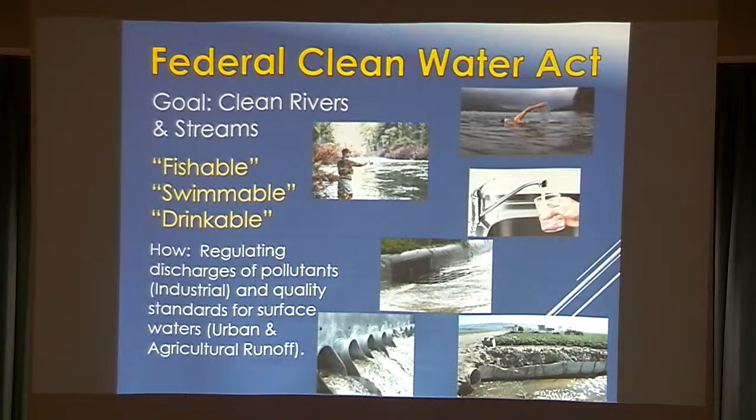The Federal Clean Water Act is why we're here today. The goal is clean water. We want the waters to be fishable, swimmable, and drinkable. The way this is done is by regulating the discharges of pollutants into our waterways and setting water quality standards for surface waters. This can be urban and agricultural runoff. We have a large footprint on this world, and this is a way to help offset those sometimes destructive things that we have, such as oil and other pollutants.

Stormwater management is mandated by the Environmental Protection Agency. It's required, as we just saw, by the amendments to the Clean Water Act in 1987. It's implemented in New York State by the DEC and the regulated municipalities.

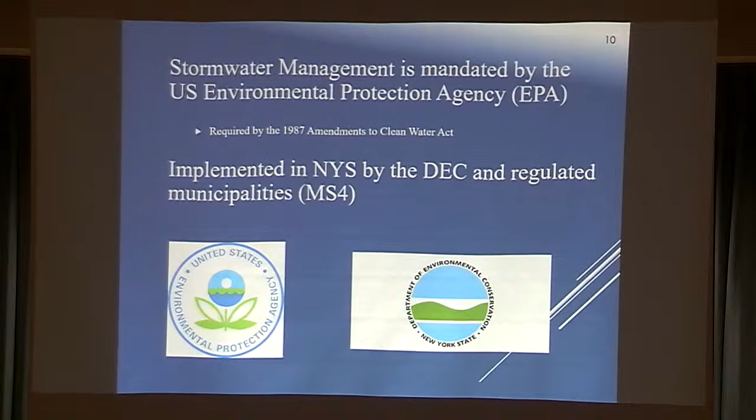So who knows what municipal separate storm sewer, oh sorry, I just gave it away. Who knows what MS4 stands for? Anybody? All right, well, that's why we're here today, to learn a little bit about the system which Schenectady County is under.

So it's Municipal Separate Storm Sewer System. This means that the water that goes into our catch basins, our ditches, is not treated before it goes into the Mohawk River, in our case. Some municipalities have large sanitation facilities to clean that water before it's put into a river or something. But in Schenectady County, that water that goes into our catch basins from the roads goes right into the Mohawk River. So the goal is to keep that water as clean as possible before it goes into the river.

Why do we do that? We want to keep our water clean, right? We drink water, our plants, our animals depend on that water. And if it's polluted, there's going to be some issues.

So, like I said, the water does not get treated. It is conveyed through water systems, ditches, catch basins, culverts. It's not part of a combined sewer, so the sewer is separated from stormwater, and it doesn't get treated. That's the big thing.

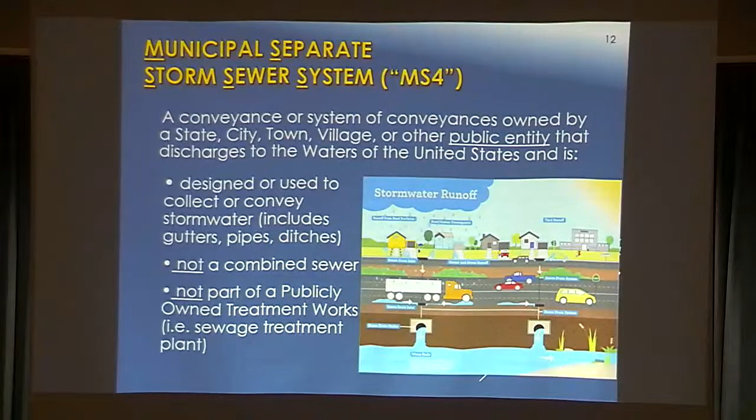So in a regulated MS4 community, there's a stormwater management program in place. Usually there's an MS4 coordinator who implements the plan. There are 6 key aspects to the stormwater management plan.

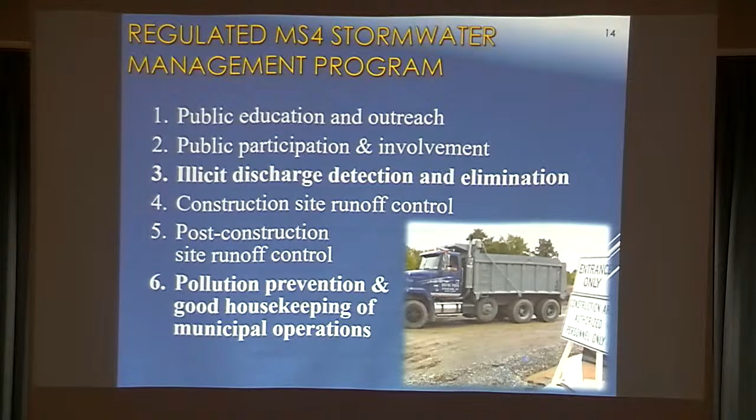Some of these are taken care of, such as public education and outreach by groups such as the Water Quality Coordinating Committee, and public participation and involvement, which is really just landowners doing what they can. In our case, in municipal operations, illicit discharge detection and elimination, which is number 3, and number 6, pollution prevention and good housekeeping of municipal operations, is what we can do to keep our water as clean as possible.

4 and 5 are really important to construction sites, and even some of the municipal operations such as culvert replacement and ditching. So it all kind of comes into effect, but we're going to really focus on 3 and 6 today.

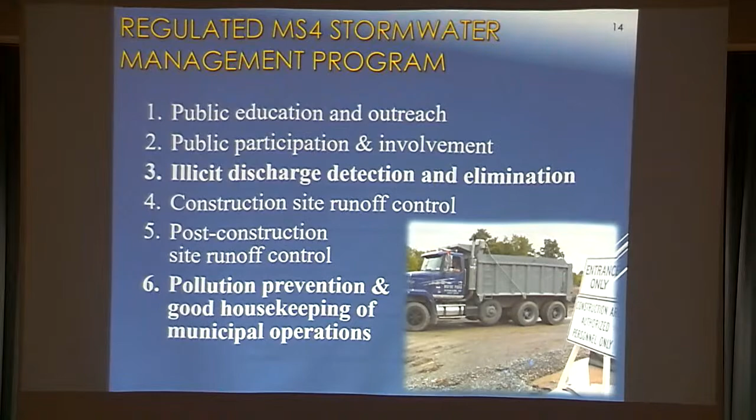So, illicit discharge detection and elimination. There are some requirements within the stormwater management plan and regulations set by DEC for MS4 communities, and that's to map the location of all outfalls and receiving waters, and to look at those and survey them from time to time to make sure that they are functioning properly and the water coming out of them is as clean as possible.

Another thing that we can do is report illicit discharges observed in the field. You guys are out there driving the roads, looking at catch basins, to keep an eye out for that. Some of the sources of illicit discharges are failing septic systems, which—we live in an urban area, we don't have a lot of that.

But maybe some of the rural areas, we can see that. Laundry wastewaters, improper oil disposal. The guy that doesn't know what to do with his used oil dumps it down the drain. That's an issue. Illegal dumping in ditches. Those ditches flow downhill and eventually into the Mohawk River. So we want to keep pollutants out of those ditches.

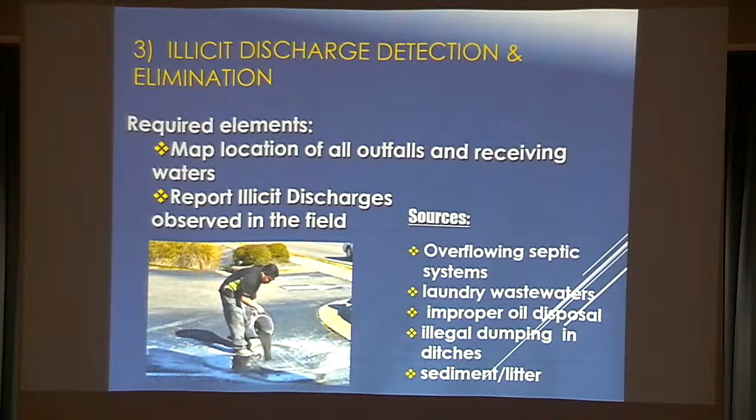And then sediment and litter. So just dirt or soil, road salt, sand, garbage that people throw out or gets blown around when people put out their garbage for garbage day. We want to make sure that we can keep those ditches and those water conveyances as clean as possible, because they do flow downhill.

And then pollution prevention and good housekeeping. Some of the requirements - this can be anything from park maintenance to vehicle maintenance, stream and wetland modification, so culvert replacement, everything that you guys do on a day-to-day basis. There's BMPs, which are best management practices, a way to complete the necessary tasks in a way that we can mitigate the pollutants that are discharged into these water conveyances via stormwater.

You can see the sediment in the one photo there going into the catch basin. That's not an ideal situation. And the big thing, what we're doing today is employee training, educating you guys on some of these practices to help mitigate this issue.

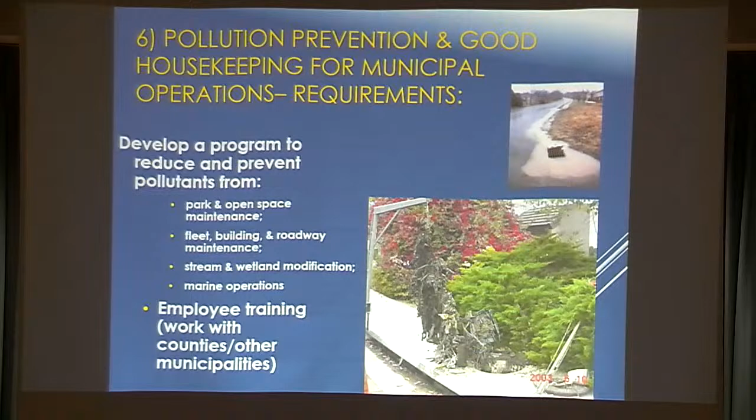So why is stormwater a concern? We already went over some of this, but we care about our plants and animals. We care about our water quality. We drink water, how we need water. Keeping these pollutants out of the waterways is so critical to make sure that we have fish for our kids to catch, and have frogs and all the animals that are so critical to our survival in a healthy ecosystem.

Where does it come from? Obviously the rain, but paved surfaces, rooftops, impermeable surfaces are an area where this water is directed to these ditches, and it can increase velocity over those paved surfaces, causing erosion and sedimentation. So all of what we're going to talk about, these BMPs are going to help mitigate the amount of stormwater and then the pollutants found in the stormwater.

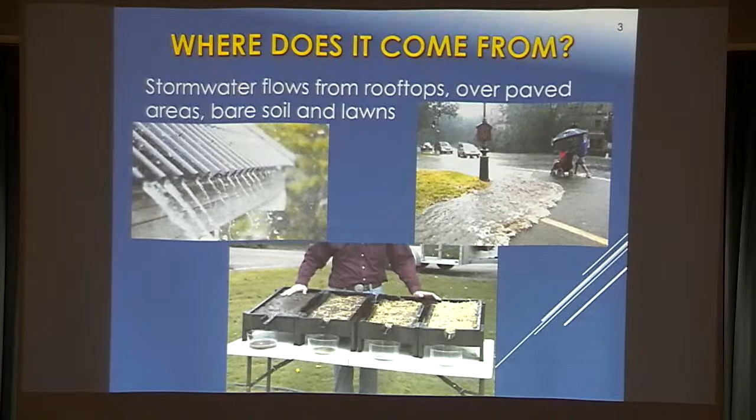A good example here on the bottom of the picture, a mulched surface versus an unmulched construction site. What they do is they simulate a rainfall event over these areas, and you can see the sedimentation coming off of the box on the left. It's unmulched. The water does not infiltrate into the soil, it runs off. On the far right, a heavily mulched surface lessens the impact of the rain falling on the soil and allows it to infiltrate into the soil, greatly reducing the amount of sediment that runs off of that area. So that's why these BMPs are very important.

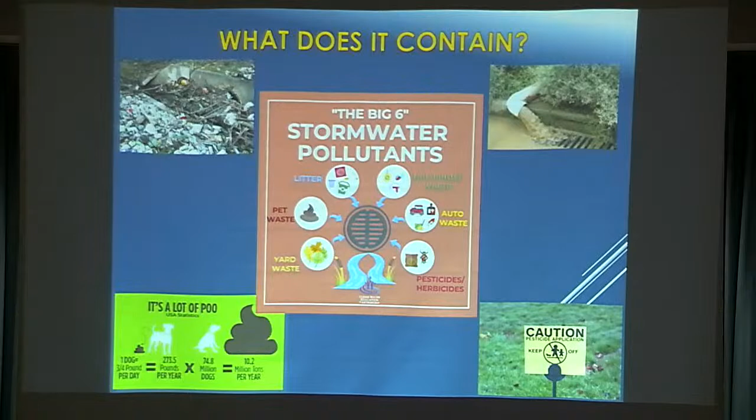Picking up leaves, pesticides and herbicides are a big one. Everybody likes a pretty lawn, but it's not always the most environmentally friendly thing. If it's applied at the proper application rate, it can be all right, but we want to make sure that those application rates are followed. It's not always the more the better, or more the greener. Follow those directions.

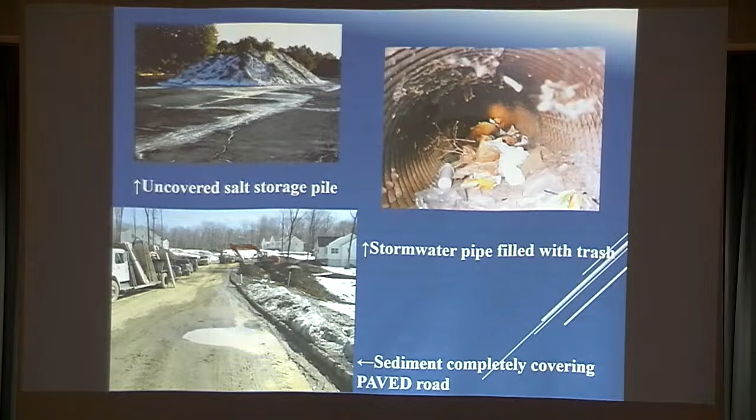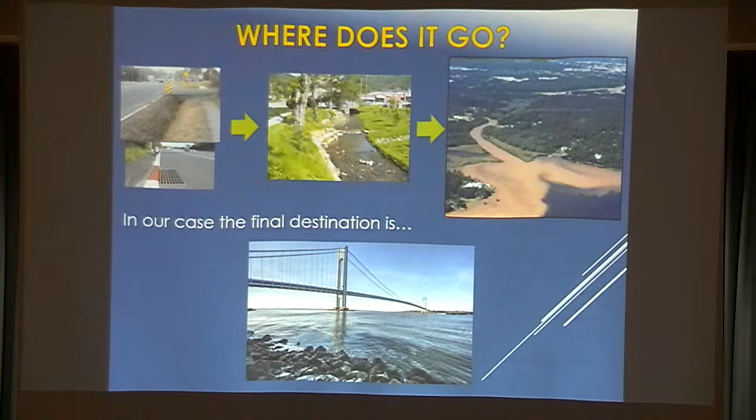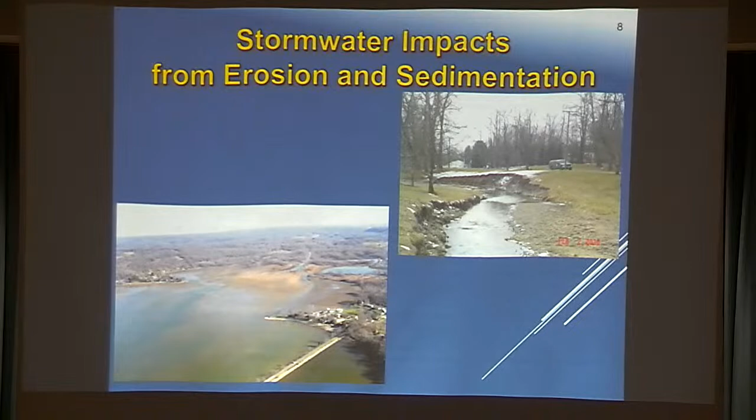Not everything can be - we can't fix everything, and we can't protect, especially on some of these really heavy rainfall events. But we can do our best to try and mitigate it with some of these BMPs that we'll talk about.

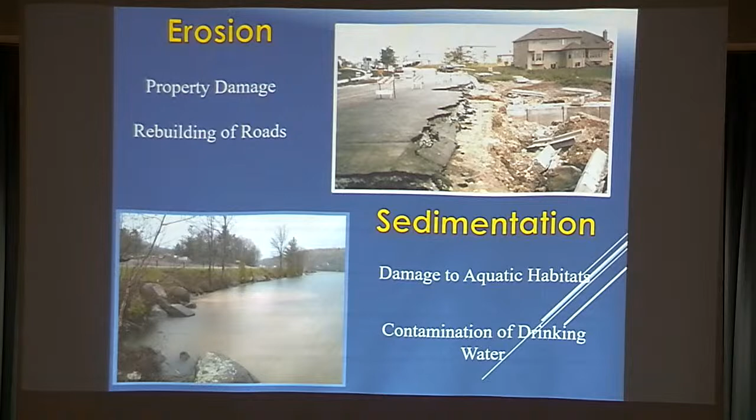So here we're going to get into some of these BMPs and actually discuss what we can do.

So the municipal responsibilities for pollution prevention measures - really, there's going to be a lot of things kind of repeated here, and that's to get you to think about it more.

It's really about maintaining a clean working environment, organized, containing paint, solvents, hazardous materials, spill response. Quickly and effectively cleaning up these spills is critical to prevent pollutants in our stormwater.

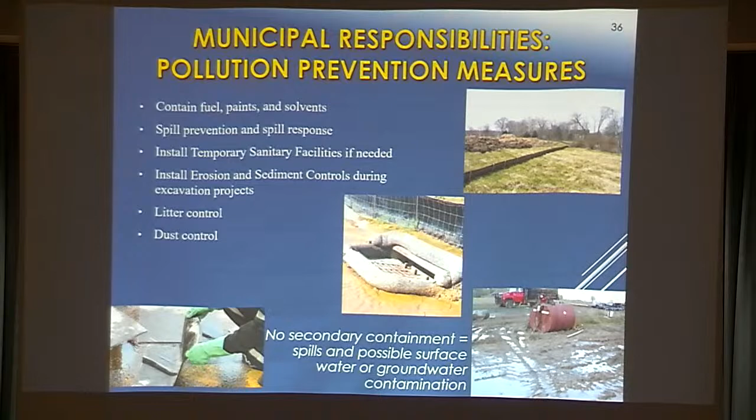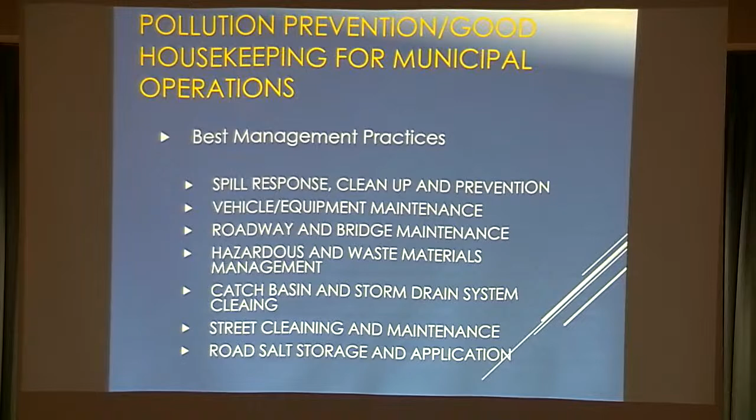So spill response, like I said, it's critical to be quick and effective at cleaning up these spills. There shouldn't be a delay. It should be immediate - we get those spills cleaned up using some of these practices: filters, absorbent pads, cat litter can be used, absorbent materials to pick up those spills and clean it up.

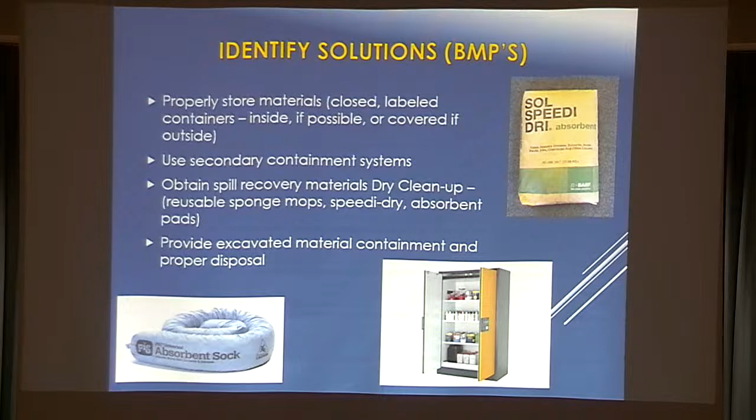We don't want rain coming down and washing them into the storm sewer. We want to have those cleaned up before that. So a big thing is properly store the materials, use secondary containment systems, use those absorbent materials, and then provide a way to properly dispose of those. We don't want to just be putting those in the trash - we want to have a proper way to dispose of them.

The oil and pollutants, the sediment, are then pumped out by a contractor and treated in a proper manner. The water is usually conveyed into a settling basin to settle out and properly be treated.

Checking the containers for leaks, keeping a clean working environment, making sure that stuff is under cover, inside storage if possible, and protect the storm drains.

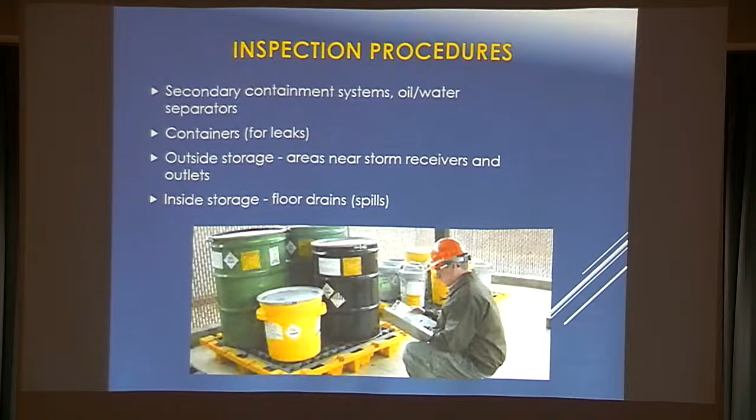So like with everything, it requires maintenance. It's not just go out there and do it and leave it. These things always need to be monitored and maintained.

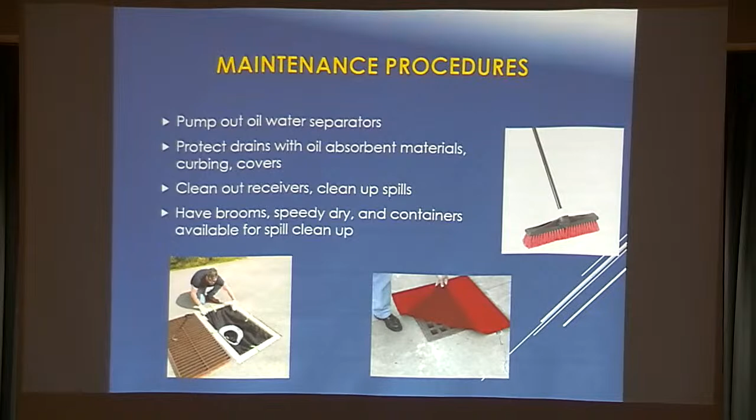So pumping out the water and oil separators, protecting the drains, cleaning out receivers, clean up spills immediately, have brooms, have everything ready to go, have a spill response kit handy with everything labeled so you're not thinking about it - it's just right there and you're ready to react to the spill.

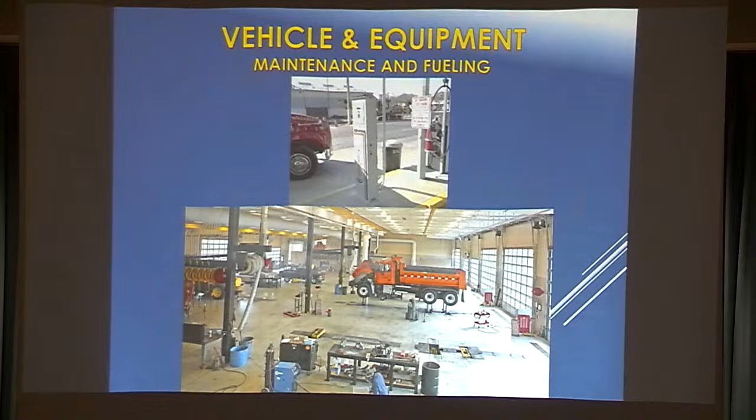Vehicle and equipment maintenance and fueling is a big one with municipal operations. What can we do to reduce the pollutants within our waterways with that?

An important one is report damage and leaks immediately. If you've got a truck that's leaking oil, get it fixed, so it's not running down the road leaking oil that's all going into our waterways. Conduct maintenance work inside if you can. It's not always possible. If not, maybe find a tarp to drape over the hood of the truck to keep the rain from washing that down the road.

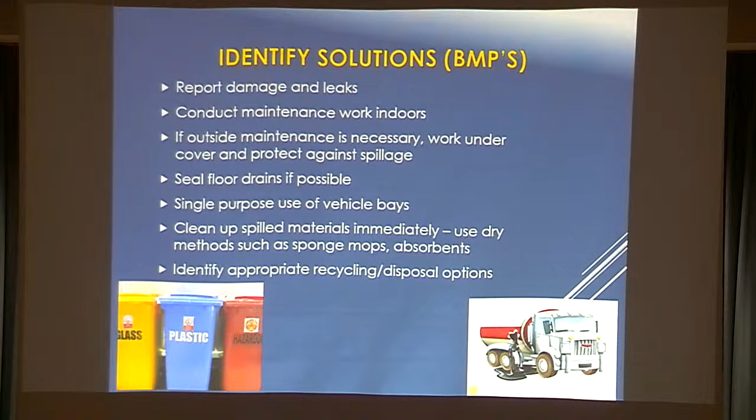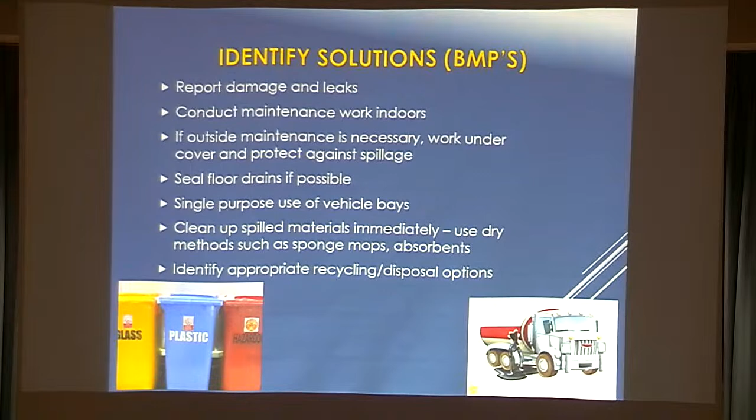Single-use purpose of bays makes it really nice, so when you're working you have everything you need for a spill, whether it be changing the oil, everything you need in that bay is there, and you're not trying to search for stuff when you really need it. Again, appropriately dispose of the materials after you've cleaned up the spill.

Again, in these maintenance areas, oil water separators are always good to have. Never leave vehicles unattended while you're fueling, in case the mechanisms to stop the pump from fueling don't work. You don't want fuel all over the place. Let's keep everything clean.

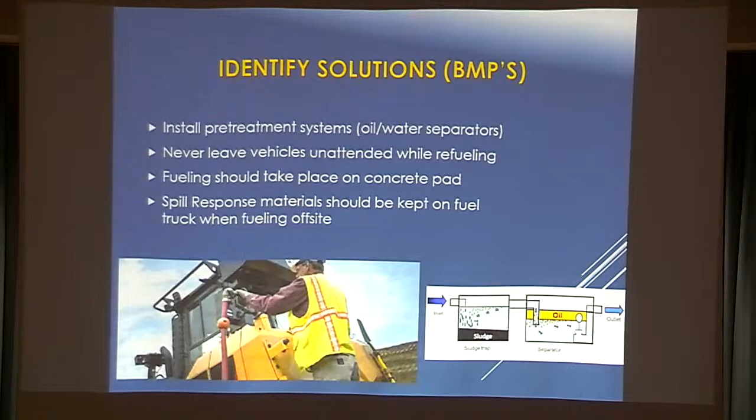It should take place on a concrete pad. There should be proper fueling areas where they're curbed, so the fuel, if there is a spill, isn't allowed to flow into a catch basin or a ditch. And again, in these areas, spill response materials should be readily available so that if it does happen, we can clean it up.

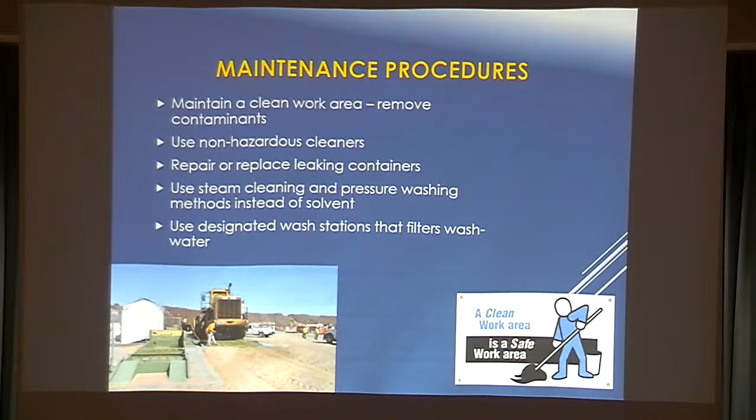Once again, maintenance is a big thing. We've got to maintain a clean work area, remove contaminants, use non-hazardous cleaners if possible, repair and replace leaking containers. There are alternate cleaning options - steam cleaning, pressure washing instead of using solvent - that's always a good thing. Why introduce a pollutant if you don't need it? So just trying to do what we can to mitigate the amount of pollutants or hazardous materials we're using is something that we can do.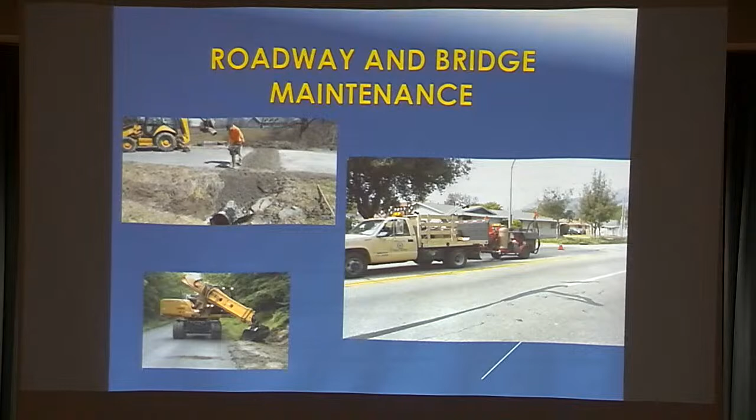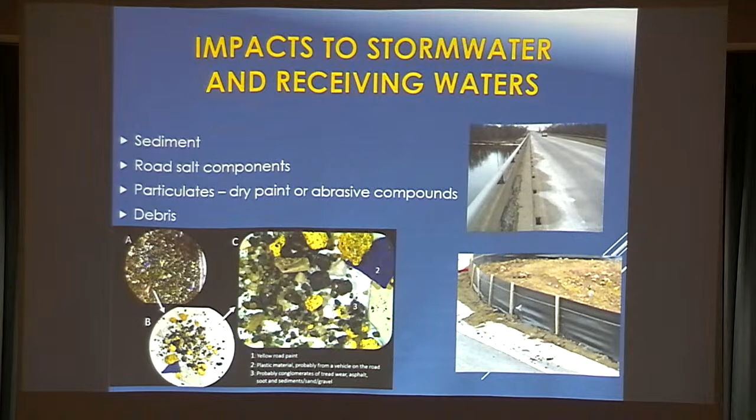So here's some examples: sediment from construction sites, road salt, which can negatively affect our natural environment, particulates from dry paint and abrasive compounds, and debris such as garbage.

So what are some of the BMPs that we can do during our day-to-day operations? We can incorporate preventative maintenance and planning, plan ahead, have those BMPs in place. How is the water going to be treated before it gets to the stream or the river? Pave in dry weather - not always possible during summer storms - but as much as possible, it's always best case scenario to do that.

Stage road operations when you can, avoid spills, cover catch basins if possible. And as I've said many times already, clean up the fluid leaks and spills immediately, so we can keep those pollutants from entering the waterways.

Also restrict the use of herbicides. Mowing is time-consuming, but using herbicides is not always the best. When you're using herbicides, you're killing off that vegetative material, and it's not able to effectively treat the water that's coming off the road.

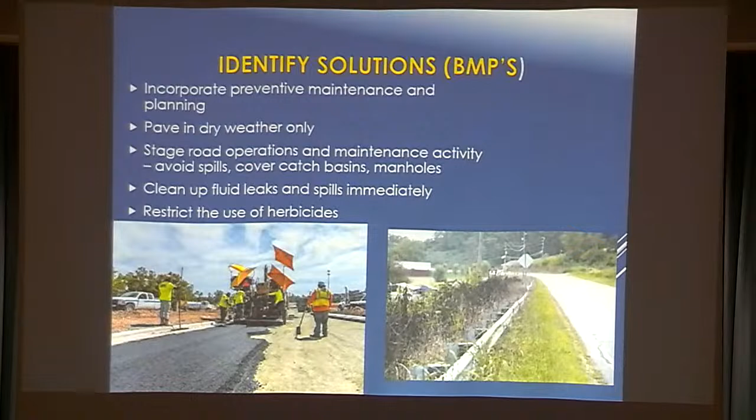That vegetation is slowing down that water. The roots of that vegetation are allowing the water to infiltrate into the ground. It's taking up pollutants, and the plants will use some of that depending on what it is, and clean the soil. So killing that off is not ideal. We want to keep that vegetation alive and serving its purpose. So the use of herbicides is not ideal - better to mow it, even if it is a little bit more labor intensive.

Some other BMPs: sweep and vacuum roads. It's going to pick up that sediment, pick up that debris, so it's not carried into our stormwater system when we have a heavy rain event.

As I said, maintain roadside vegetation. So after ditches are cleaned, there's an example there in the lower corner of hydroseeding. This is a mix of seed, some sort of grass seed, fertilizer, tackifier, and mulch, which protect the soil from erosion during these heavy rain events.

The idea is to get that grass, that vegetation, growing as quickly as possible so it can serve its purpose and filter the runoff, allowing water to infiltrate as much as possible. Having water in the ground is always better than having it flowing down a ditch. We want it to go into the ground where it can be stored, instead of running down the road ditch and gaining speed, which causes more erosion. The faster the water is moving, the more erosion takes place, and that vegetation slows it down and allows it to go into the ground.

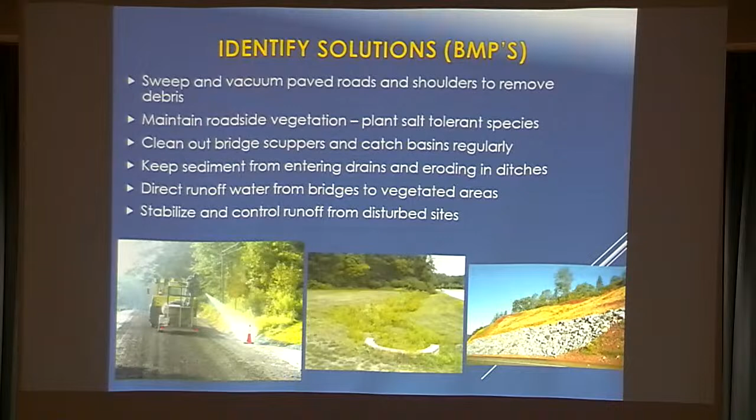So you can see the rock that's used to armor the hillside. That's going to help that slope stay in place and keep the sediment from flowing down the hill into the road ditch.

We went over some of this hazardous waste and materials management, but it's so critical to keep things organized—keep them labeled, know what's in it, and make sure you're using the right product for the right application. Eliminate floor drains; we don't want these materials flowing into our waterways.

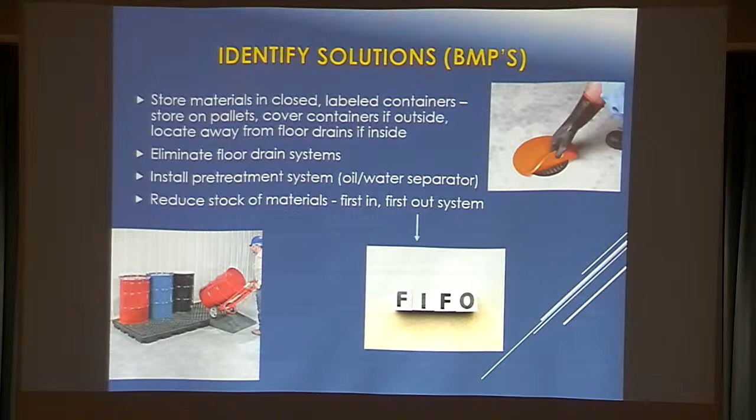Install oil water separators, and reduce stock of materials. Use the first in, first out system—don't accumulate too much. Let's just be organized and try to keep things as neat as possible. That's going to be the best case scenario.

As I said, there are different products out there. Let's try and use the most environmentally friendly options if possible, and reduce the use of these solvents. Ensure proper disposal of all the material afterwards.

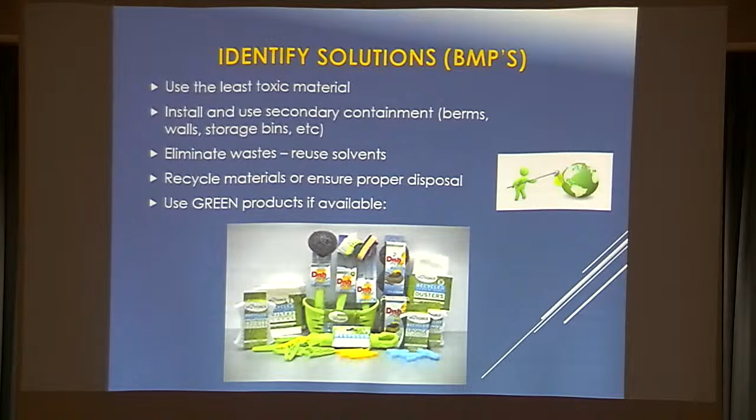And again, everything requires maintenance. Just replace and repair any leaking or defective containers. Regular inspection should be done on these sites, and maintain aisle space so that you can do the inspections and make sure things are in order.

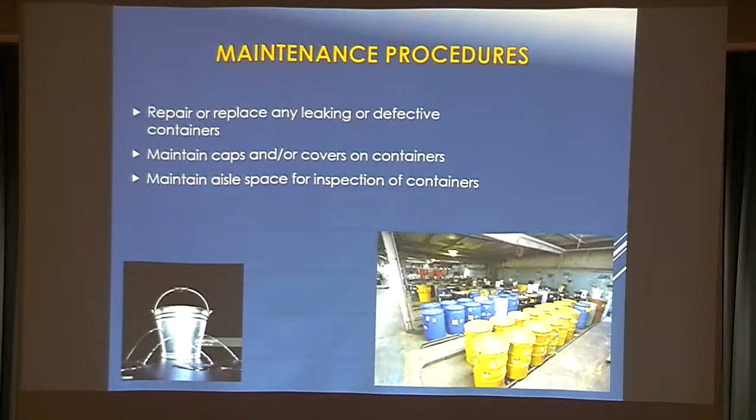Catch basin and storm drain cleaning—we kind of went over some of this, and this is a major thing you guys are doing. But the BMPs we've talked about beforehand have kind of led up to trying to minimize what goes into these catch basins, right? So proper street cleaning to avoid leaves backing up the catch basin.

Vegetated areas keep sediment out of our catch basins so that maybe we don't need to vacuum as much. If we can put some of these BMPs in place, we might be able to not have to do so much on the back end.

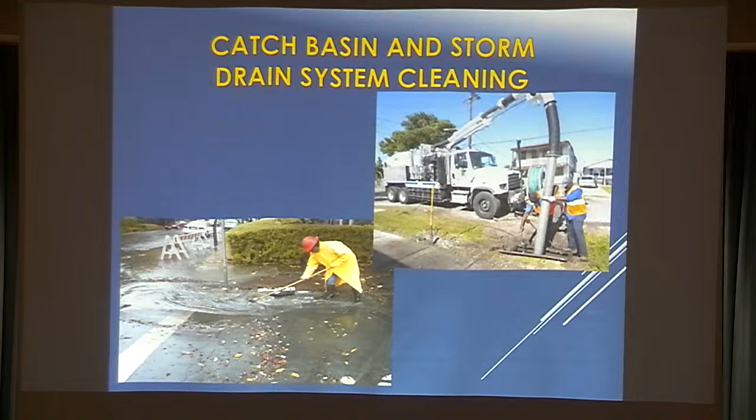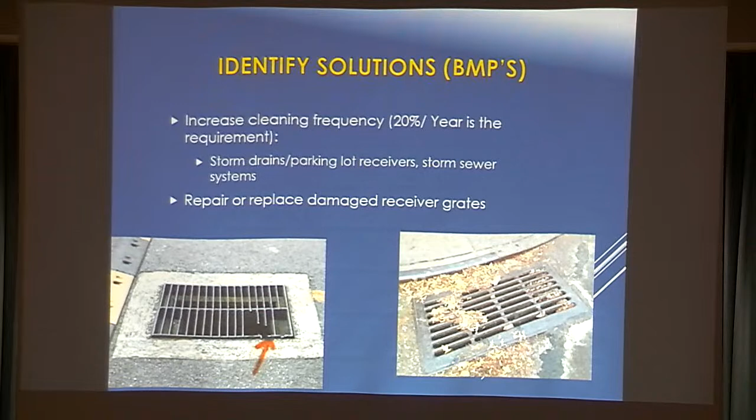So we want to make sure when we're doing these things, we take note and make sure the catch basins are clean and free of debris, so it's not getting carried through the catch basin into our waterways, and making sure they're not damaged. We don't want foreign objects that can get into the culverts and clog them. So just regular maintenance and repair if needed is always something we need to be looking for.

In the spring, you're getting the dirt and sediment out of the catch basins. In the fall, you're getting the leaves out, or preventing leaves from blocking the catch basins. Establishing proper ditches with the right slope, installing filter socks or rock bars to help slow down water, catch sediment, reduce erosion, and reduce sedimentation downstream. That's a good example of a proper waterway or ditch that will reduce erosion and sedimentation.

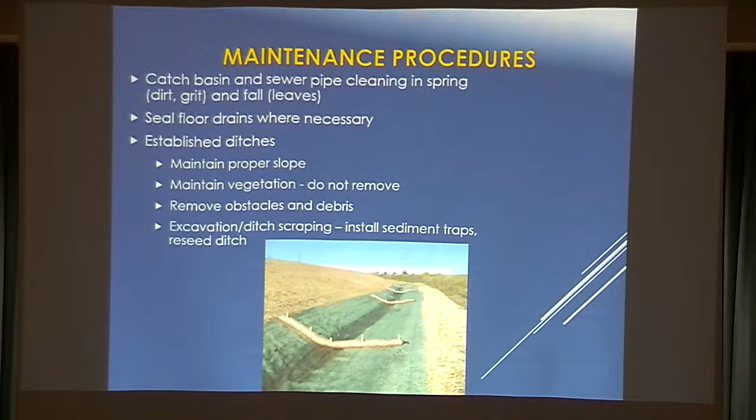So during street cleaning, what are some of the BMPs there? Making sure this is done at regular intervals or as needed. Say you're working on a construction site and there's a lot of dirt coming onto the roadway, before the end of the day that should be cleaned up as well as possible, so if there's a rainstorm overnight, that sediment isn't carried down the road.

Shouldered roads are always better than curbed ones, because curbed roads keep that water on an impermeable surface, carrying it down the road and picking up debris along the way into our catch basins. A shouldered road allows the water to flow off into the ditch, where it can be treated by the vegetation that is hopefully living there, because we're hopefully not spraying herbicides everywhere, so that vegetation is alive and serving its purpose on the side of that shouldered road.

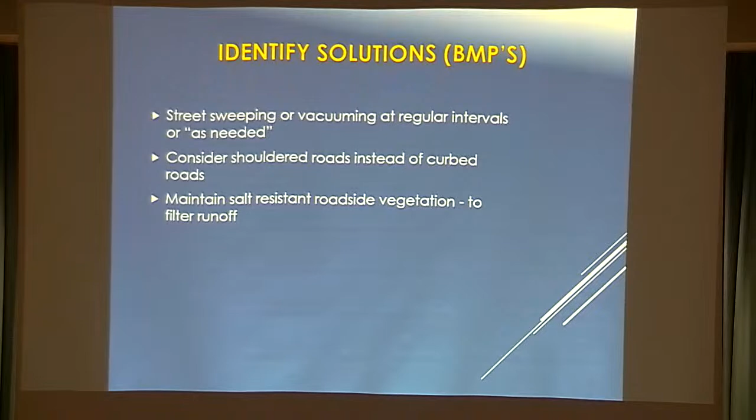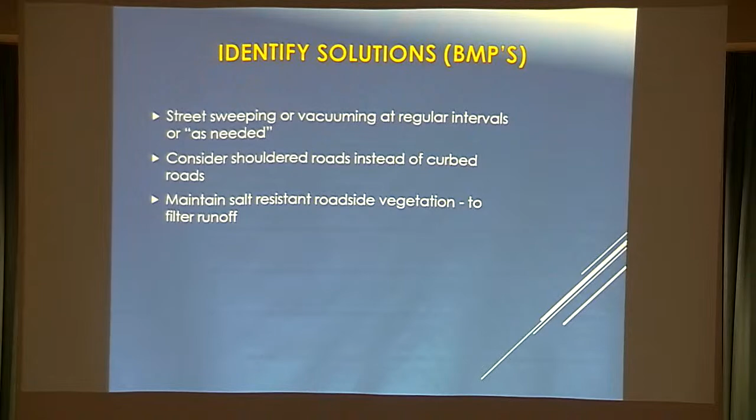A big thing is trying to maintain salt-resistant roadside vegetation, because salt can kill plants when it's in high concentration, so salt-resistant roadside vegetation is always a good option.

Making sure that spring sweeping and vacuuming is done. As I said, fall leaf collection is critical to keep our catch basins clean. Vacuum in dry weather if possible. If you have to, implement parking bans so you can do your job effectively in all areas of the municipality. Again, maintain equipment—it's so important to check for leaks and repair them immediately—and then stage road operations, and cover catch basins if you can.

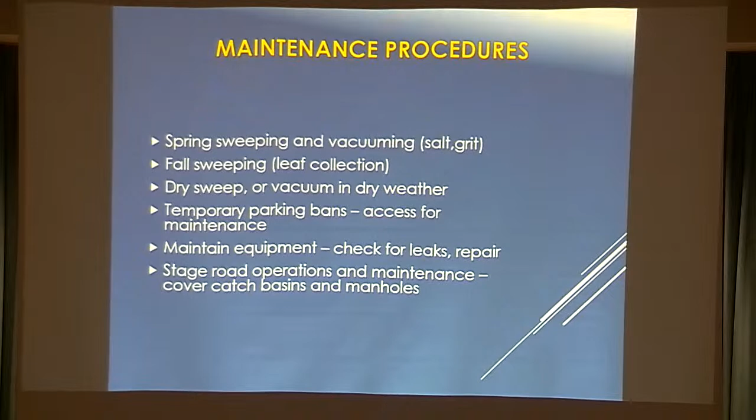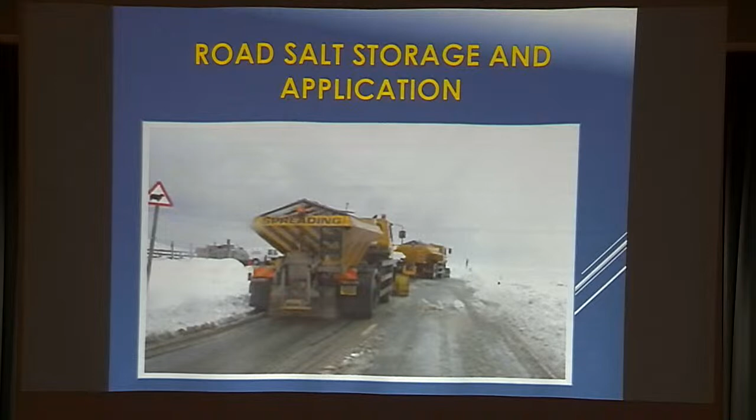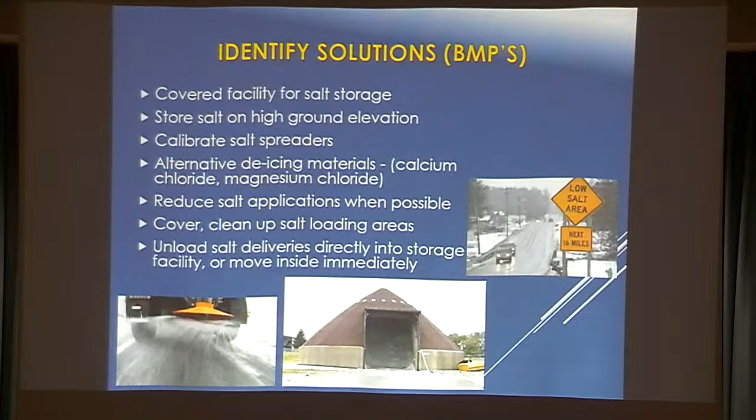As we saw yesterday, road salt is necessary, but it definitely has negative impacts on our environment. So we want to try and reduce when we can, making sure we do what we can to reduce salt's effect on our environment.

This is covering salt storage facilities, making sure that when a salt shipment is brought in, everything's cleaned up. When you're filling up trucks, if there's a spill, clean it up immediately so it's not just swept down the road during the next rain event. Calibrate salt spreaders, and do what we can.

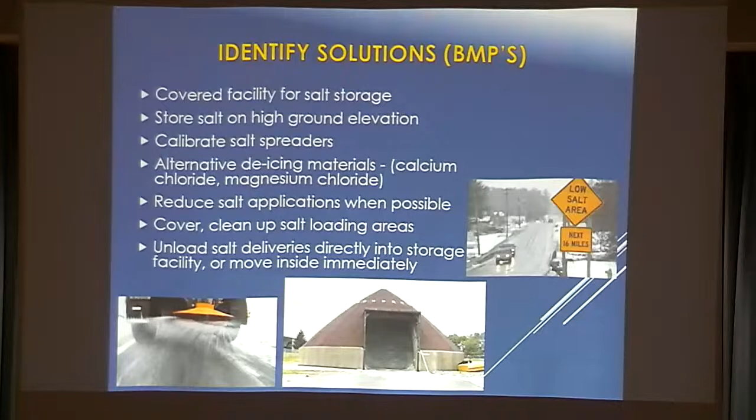Again, calibrate spreaders on a regular basis, clean up spills, and educate and train new operators on the hazards of oversalting. That's what we're doing right now. There's a lot of good research going on right now about the impact of salt on roads.

Up in the Adirondacks, they're looking at what salt can do to our water bodies and the aquatic life within those water bodies. So hopefully, in the next few years, things catch on, and maybe there'll be some alternatives that are more reasonable and more cost effective.

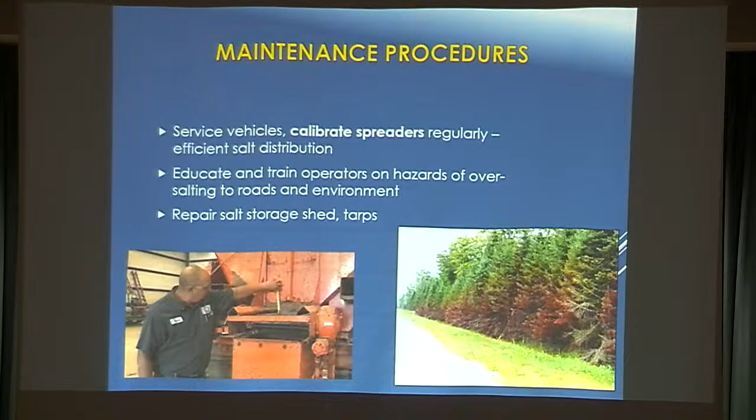So to sum it up, we have a large footprint on this planet, and what we do can negatively affect our environment. But there are a lot of things we can do to help mitigate that. Using these BMPs reduces the pollutants in our municipality, which in turn reduces the pollutants entering our waterways, which all go into the Mohawk River and eventually into the Atlantic Ocean in our case. So we want to try and keep our water as clean as possible.

So if you can just take a second with your operations from day to day and think about how you can mitigate some of those things we talked about today, it'll all help. We all need to do our part to keep our water as clean as possible.

Any questions, thoughts? All right.